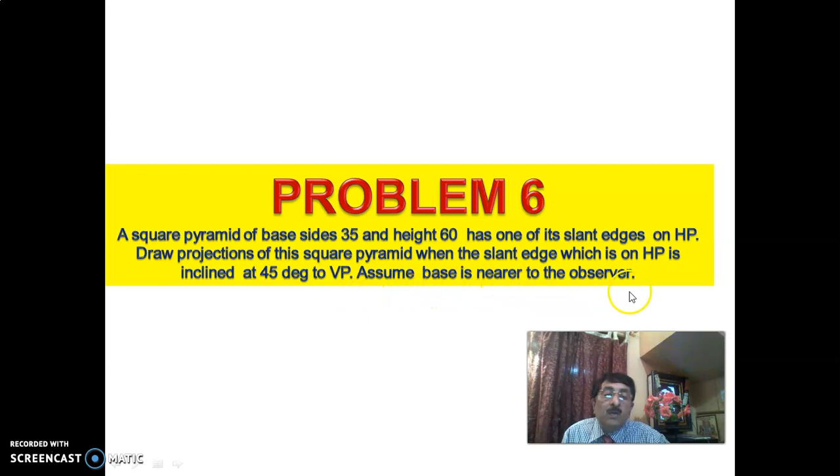Now, problem 6 says a square pyramid of base sides 35 and height 60 has one of its slant edges on HP. Draw projections of this square pyramid when the slant edge which is on HP is inclined at 45 degrees to VP. Assume base is nearer to the observer. This is the problem given.

Now, as usual, we start this way. Draw the square pyramid in the top view like this. A, B, C, D, 4 edges, OA, OB, OC, OD, another 4 edges, totally making 8 edges. Square pyramid, base sides will be 35 mm. And draw the corresponding front view with height as 60.

As you see here, A dash is this, front corner is B, we are looking from here, B dash bracket D dash, and this is C dash. Apex point is O dash. Now you have 4 edges here, 1 edge here, 1 edge here, totally 6, plus 2 here. OB and OD are merging, OB as the front edge.

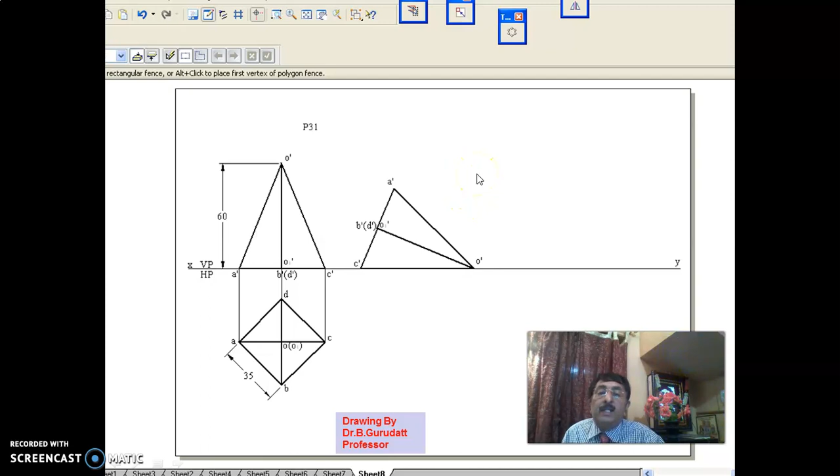Now as you see in this problem, it is completely tilted such that the square pyramid is resting on slant edge O dash C dash on HP. You can clearly see this front view and this front view remain same. What you do is move, copy and rotate in such a way that O dash C dash is on XY line, and since O dash C dash is a slant edge, it is clear that slant edge is on HP.

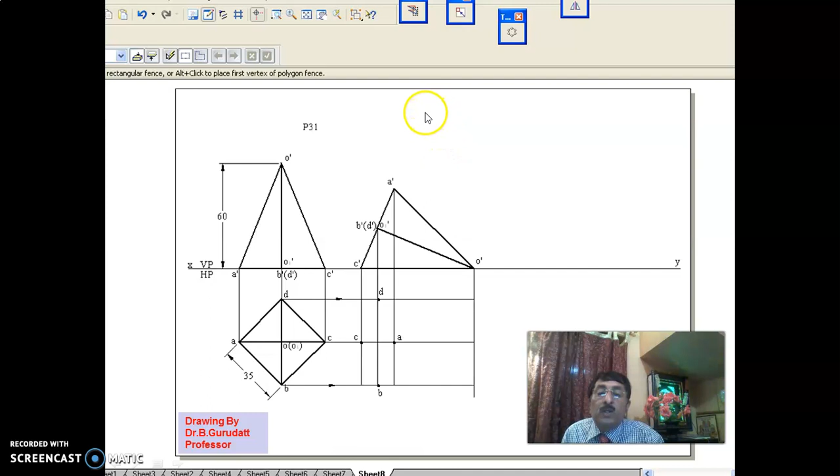Once you know this, you take the projectors down. You are expected to draw one top view for this position. Now, as usual, you get all the points. This is C. On this line, you should find D and B. On this line, you should find A. Once you have all the points obtained, join the outer boundary of these points.

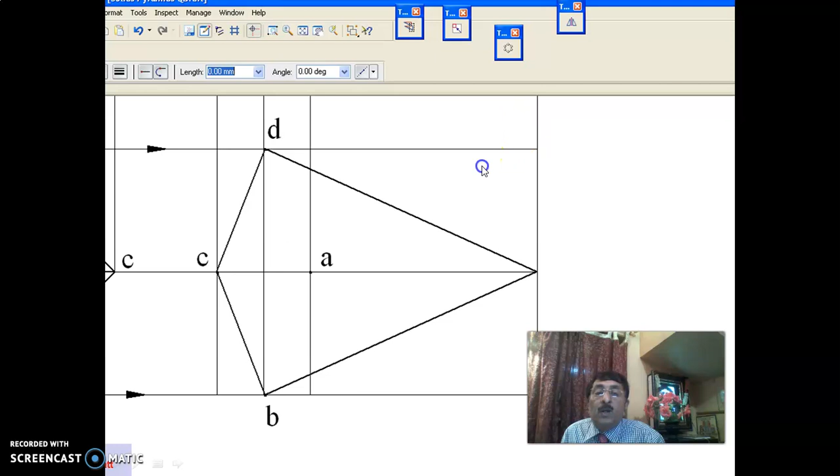As you are aware, in this problem, when you are looking from the top, base is nearer to the observer, base is exposed. Hence, after outer boundary, as a second step, since base is exposed, base will be darkened. As a result, now you have 4 plus 2, 6 edges. You are looking from the top. In the third step, you have to complete 2 more edges. 6 edges are already over.

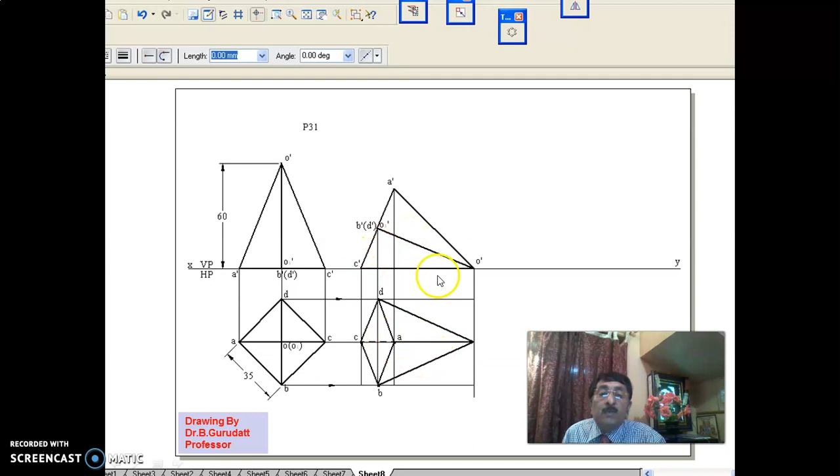2 more edges are, one is AO, and another is CO. Since AO is nearer, we darken AO. And since CO is far away, we make CO dark dotted. Now as you see here, since AO is nearer, I'll darken AO. But CO, though it is invisible, you can show invisibility only up to A. Beyond that, it is merged with AO. CO is totally invisible, but the dark dotted line is shown only between C and A. It continues till the apex.

Now, axis is O to O1, that has also been shown. Now the problem says the slant edge which is on HP is inclined at 45 degrees to VP. As you know, the slant edge which is on HP is in true length in the top view. This OC is in true length, actual length.

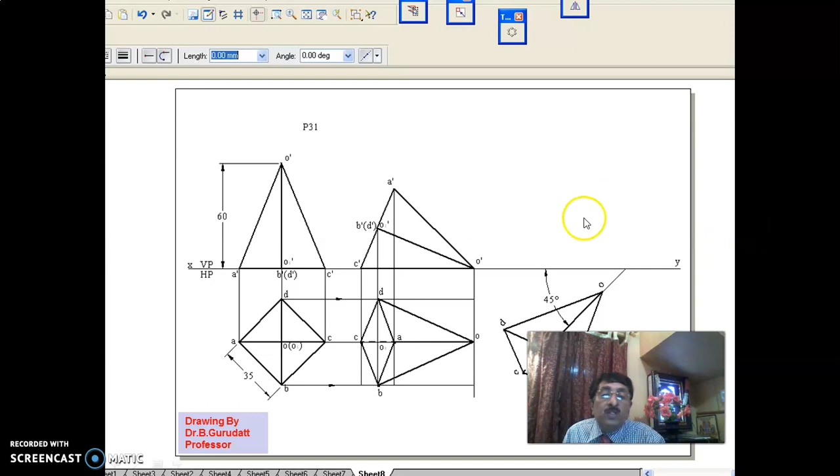That is why, when the slant edge on HP is inclined at 45 degrees, since it is true length, we don't have to undergo beta construction. Directly move, copy and rotate such that OC, not the top view of the axis, it is the OC slant edge which is inclined at 45 degrees to VP. Once you do this, take all the points to the front.

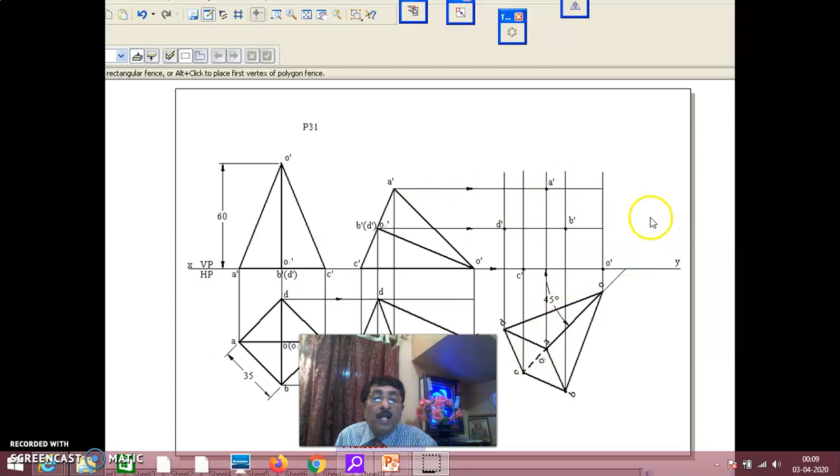As you see here, O is here, O dash is here, C dash is here, B and D should be on this line, A should be on this line. You get all the points. As usual, the first step is always the outer boundary. Outer boundary, we do it dark, using 0.5 mm thickness line. Outer boundary has to be dark and it will be seen by the observer.

Then, when you are looking from here, base is nearer than the apex. Hence, base edges are darkened. That means base can be seen by the observer, so you darken the base immediately. Now you count the number of edges, 4 of the base, plus O dash C dash and another, totally amounting to 6 edges done. We have to complete 8 edges totally.

You are left with O dash B dash and O dash D dash. Since B is the nearest corner, OB is the nearest edge, and it has to be seen by the observer. Hence O dash B dash we darken. Since OD is the far away edge, for an observer looking from the front, the back edge cannot be seen. Hence we make it dark dotted. Finally we'll show the axis also.

This completes problem number 6, projection of square pyramid, where the square pyramid has slant edge on HP which is inclined at 45 degrees to VP. In this complex position, we have drawn how it is seen in the front view and top view. Always know, first stage front view will be same as second stage front view because it is moved parallel to VP, and second stage top view will be same as third stage top view because the inclination will not be changed with respect to HP.

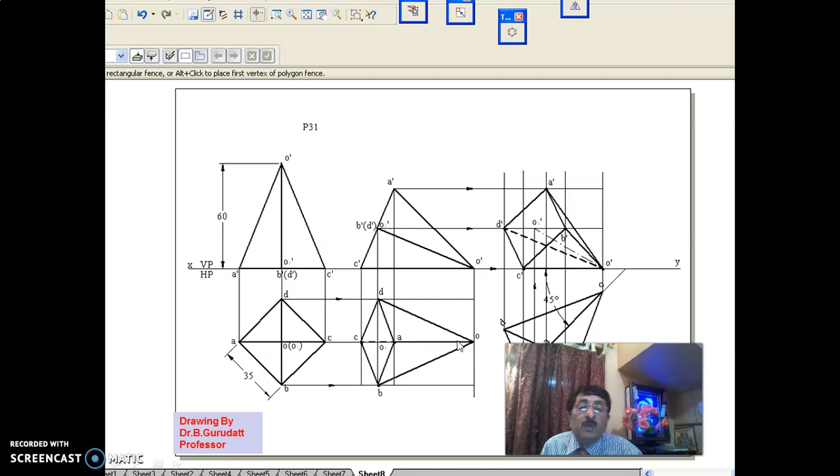Now we move on to problem number 7. In this problem number 7, a square pyramid of base sides 35 and height 60 is hung on one of its corners of the base with top view of the axis inclined at 45 degrees to VP. Draw projections of this pyramid in this position, assuming apex to be nearer to the observer.

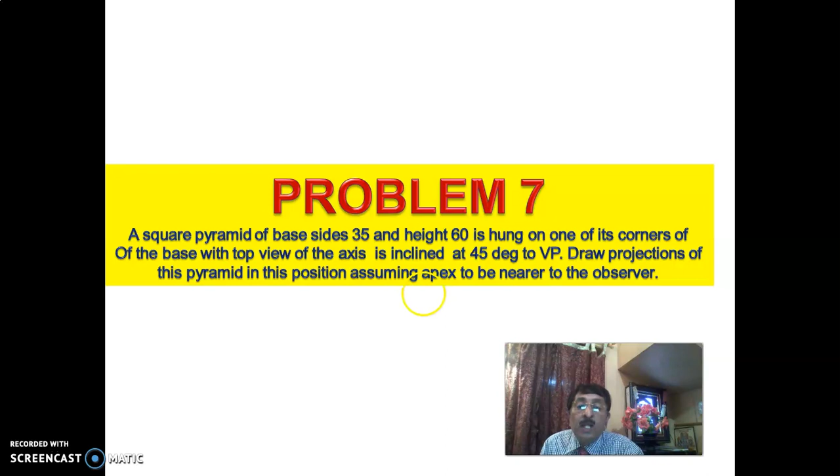Now in this problem, you start like this only. Draw the square pyramid. In the top view you draw A, B, C, D, OA, OB, OC, OD, O1 is the axis, 35 is the side. Take the front view. This is A dash. When you are looking from here, B can be seen, D cannot be seen, B dash bracket D dash, C dash, and height is 60, O dash apex is at 60.

Join all this. Now you have 4 edges, 1 edge here, 1 edge here, and 2 merged edges here, OB and OD. OB and OD are merging. OB is the front edge, OD is the back edge. Now, as I've said, this is a solid. Solid means, for a pyramid, the center of gravity is located 15 mm from the base.

That means 60 means 1/4 of 60. That is, 1/4 of its height will be the center of gravity. That's why we locate G dash at a distance of 15 mm. Okay, once you do this, the idea here is once you get the G dash, if you imagine a plane here, the weight below G dash will be equal to the weight above G dash.

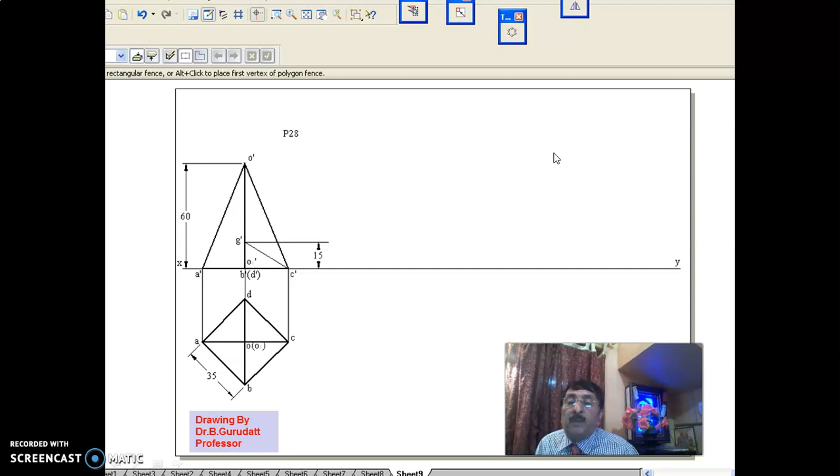Now, it is a suspension problem. What you do is, we tie a thread to the corner, C dash, and if you hang it in the space, as per the property of the solid, the line connecting the corner and the center of gravity will be perpendicular to HP. In that way, when you do this, you can clearly observe this way.

That means you are tying a thread to this corner and hang it in the space. If you hang it in the space, the line connecting the corner and the center of gravity is perpendicular to XY line or HP. That means you move, copy and rotate in such a way that C dash G dash is perpendicular to XY line. This you do in the second stage.

This is a new problem, very important from the examination point of view, where in suspension problems you should know how to locate G dash, and in the second stage front view you assume a thread is tied to one of the corners, either A dash or C dash, and if you hang the entire solid in the space, the line connecting the corner and the center of gravity will be perpendicular to HP or XY line. Now it is this way. Now it is hanging in the space, and it is hung at a corner C dash.

Now once you make it to this position, the procedure remains same. Get all the points in the other view, and the next step is join the outer boundary of these points as usual. First step is over. Second step, compare apex with the base. When you are looking from here, base is nearer, immediately darken the base. Now 4 plus 2, 6 edges over.

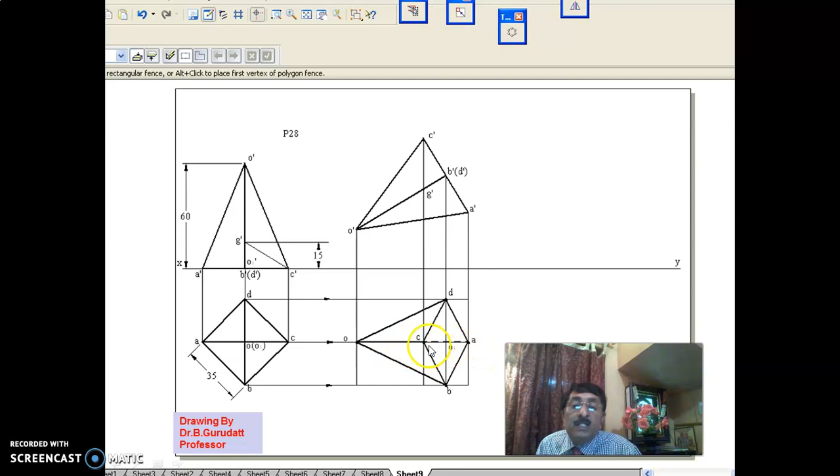You are left with only 2 more edges, OC and OA. Since OC is nearer, darken OC. OA is invisible, you make OA dark dotted, but dark dotted can be shown only between C and A, because up to OC the invisible edge is merged, and you show the invisible edge, that is dark dotted, only between C and A. Show the axis also.

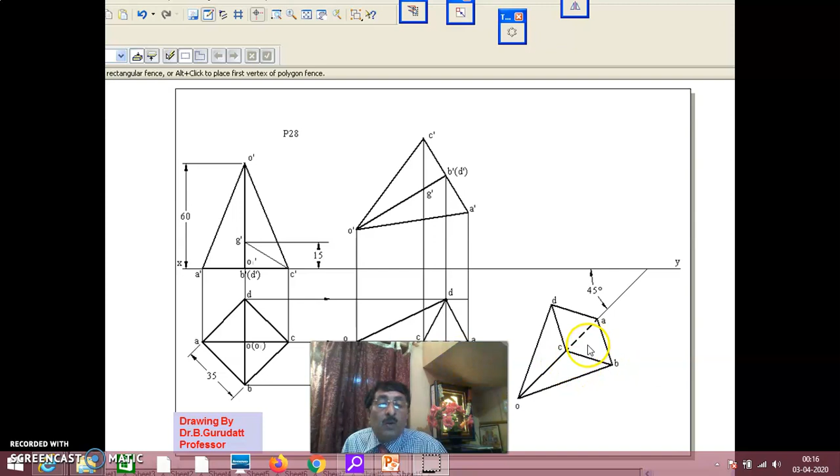Now in the third stage, what they say is, the top view of the axis is inclined at 45 degrees to VP. That means move, copy and rotate in such a way that the top view of the axis is inclined at 45 degrees to VP. Then once you get the third stage top view, copy and paste and rotate, get all the points in the other view, join the outer boundary of these points.

Since apex is nearer than the base, remaining edges of the base should be made dark dotted, invisible. In that way, I have made them invisible. Totally 6 edges are over. You are left with O dash B dash and O dash D dash. O dash B dash, since it is nearer, is darkened. O dash D dash, since it is away, is made dark dotted. In that way, 8 edges are completed, and finally show the axis. This completes problem number 7, which is a problem of hanging.